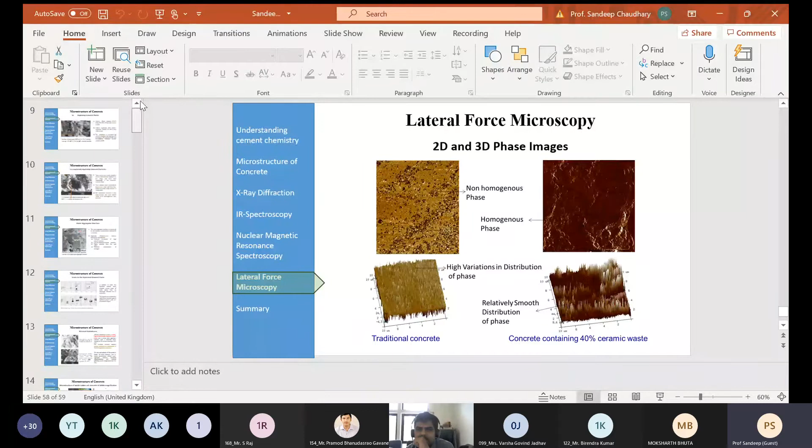So we'll be discussing a little bit about the microstructure of concrete today. If you look into the history of concrete, particularly from the perspective of research carried out on concrete, people used to work on strength aspects some time back - compressive strength, flexural strength, impact resistance. These were the standard tests used to define or ascertain the quality of concrete.

Over the years, people realized that just the strength aspects are not important, but along with that, the durability aspects are also equally important. So people started focusing on durability. We know that the Indian Standard 456 code was revised in 2000, and there's a major change in this code in the sense that it emphasized durability equally as much as strength, compared to the earlier version. People realized the importance of durability, and then they worked on different aspects of it.

Like for strength, people used to do compressive strength tests, flexural strength tests, etc. For durability, people started doing permeability tests, shrinkage tests, corrosion tests, carbonation tests, freeze and thaw tests, and so on and so forth.

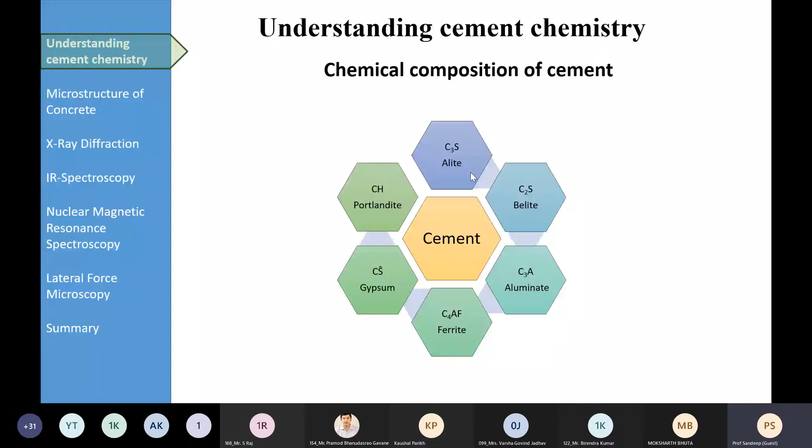There are a large number of reactions taking place in the cement, and these reactions are responsible for the strength we observe, or responsible for the durability properties we observe. So we should be very cautious about the presence of C3S, C2S, alite, belite, ferrite, gypsum, because they participate in these chemical reactions, which ultimately we observe on the surface through tests as compressive strength, flexural strength, or durability properties.

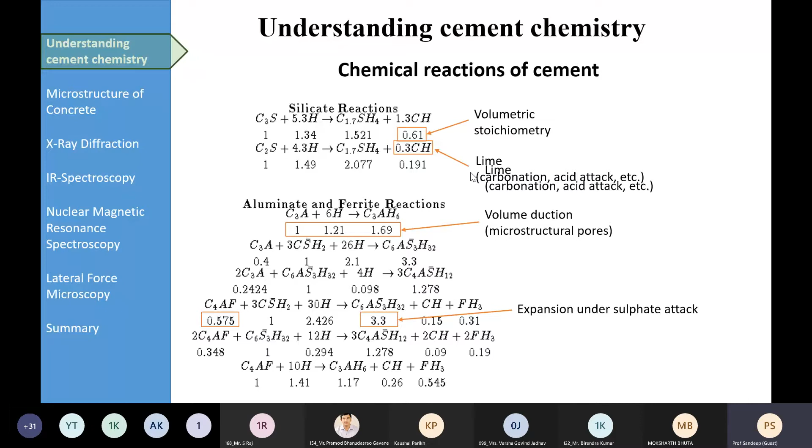So this cement chemistry has a very important role on durability, and it helps in understanding the behavior of the cement first. We need to know the cement chemistry very clearly, because only then can we understand the behavior of the cement, and then durability characteristics like carbonation, acidic attack, and chlorination, etc.

These depend on the free lime present after cement hydration. So again, if we know the cement chemistry, only then will we be able to judge the amount of free lime present after the cement hydration. That again is quite important for understanding durability, etc.

Also, just as compressive strength is one of the most important parameters defining the strength of concrete, similarly one parameter which defines the durability of concrete is permeability. Water penetration depth is also related to permeability, and it depends on the pores formed from volume reduction. This volume reduction is a function of cement chemistry, or hydration reactions, which are themselves a function of cement chemistry.

Similarly, alkali-silica reaction is another durability-related problem, which is quite detrimental sometimes for concrete in the long run. So alkali-silica reaction, sulfate attack, effect of seawater, and other environmental threats can all be better understood through cement chemistry.

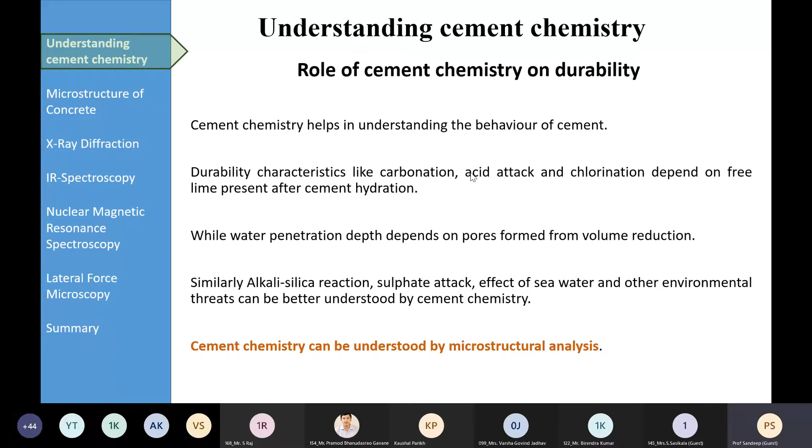Now, to understand this cement chemistry in turn, we need to go to microstructure analysis. Let's see what this microstructure analysis is all about. There are different forms of microstructure analysis. Analysis at the microstructure level can basically be done in two phases: one is conventional microstructure analysis, where we do imaging, etc.

Another is chemical analysis. In conventional microstructure analysis, we identify the mineral arrangements under a microscope. That is, we observe the concrete under the microscope and try to find out which types of minerals are present there. It's like taking a photograph at high magnification, then looking at the image and identifying which type of mineral is present.

This microstructure analysis can be studied using scanning electron microscope, optical microscope, TEM, etc. On the other side, in chemical analysis, we identify the types of minerals formed in the concrete, and this can be done using EDS, XRD, spectroscopy, etc. Both are very important; we need microstructure analysis as well as chemical analysis.

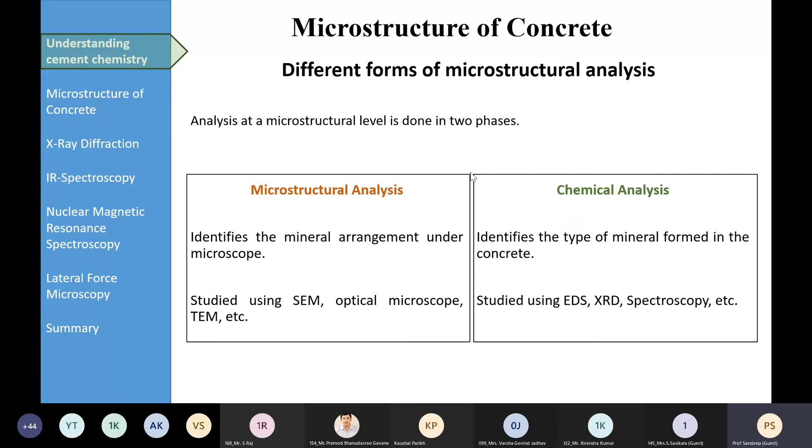Now let's see this microstructure analysis through microscopes. This slide shows concrete under different magnifications where we can see the mineral arrangements. This is how the concrete looks to the naked eye, but if we zoom in at 200x, using a magnifying glass with 200 times capacity, the concrete which looked like this will now look something like this.

If we further zoom into a selected portion, it will look like this at 2000x. If we zoom further to 5000x level, we'll see the concrete like this. So the concrete is the same, but as we keep zooming at different magnification levels, the type of mineral arrangement we see is quite distinctly different.

The idea is that if we just go through naked eye visualization, we'll never be able to see all these different phases which are present in the concrete. And of course, each of these phases has a certain role in the strength development as well as in the durability related issues of the concrete.

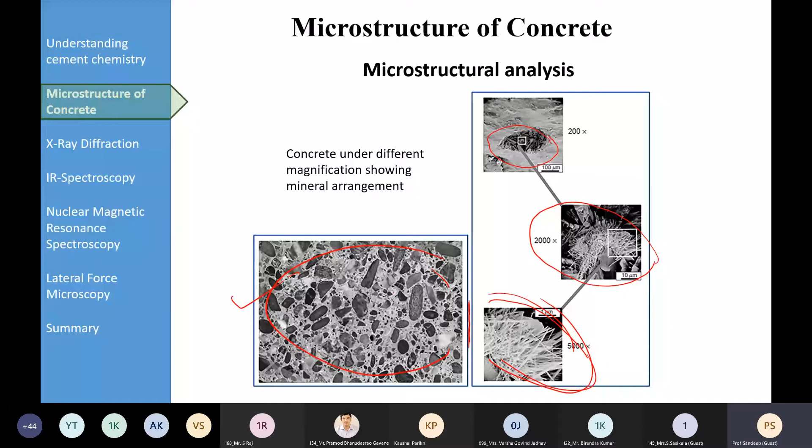So if you have two images of two types of concretes at a certain magnification level, we can say that if one image is having more contribution or more participation of CSH, then we'll say that concrete is better.

This is a typical microstructure image here. You can see these are the aggregates, quartz aggregate, which are present there. This is the cement paste, which is visible here. The magnification level denotes just 200 micrometers. And this is cement paste, this is cement paste, and this is the transition zone between aggregate and the cement paste.

Now, this transition zone is very important. Normally we do think that the strength of the concrete is governed by the aggregates or it is governed by the cement. So conventionally people think that a concrete is going to fail when either the...

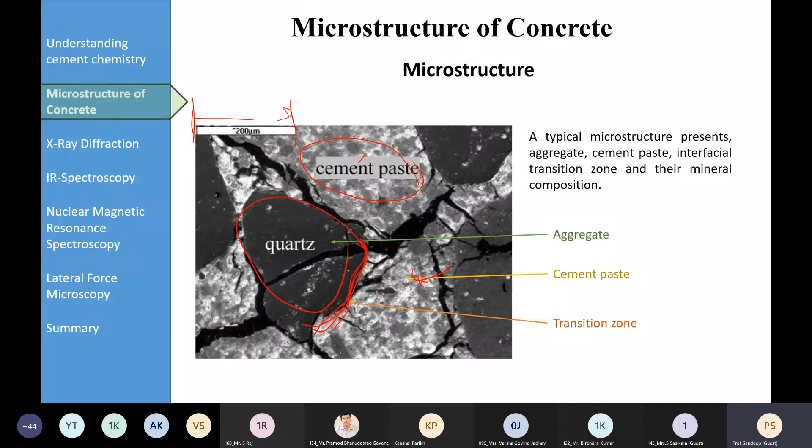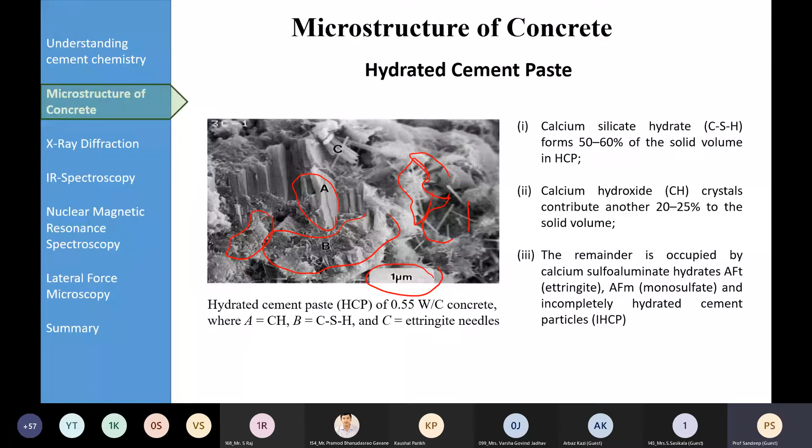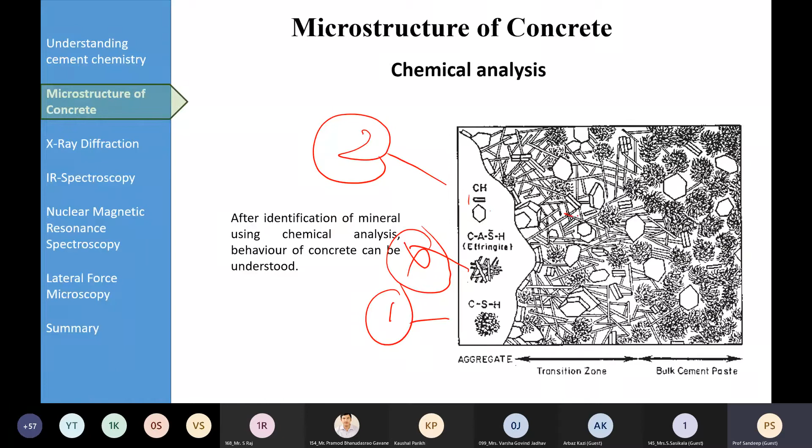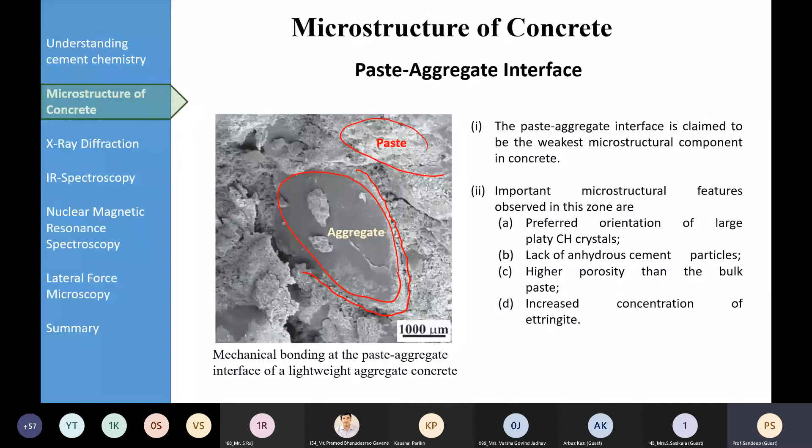Now let's try to understand when we are doing this microstructure imaging, we have to observe the interfacial transition zone also. We have to look for anhydrous, incompletely hydrated cement particles also. We have to look for calcium hydroxide, CSH, and ettringite needles, etc. And we have to see the transition zone very clearly.

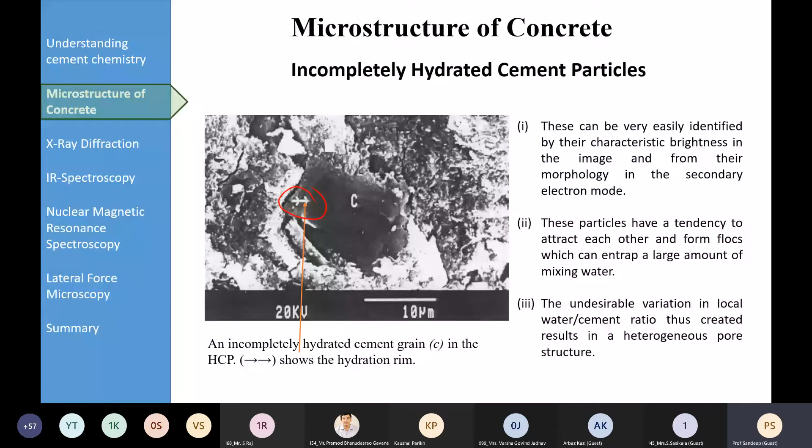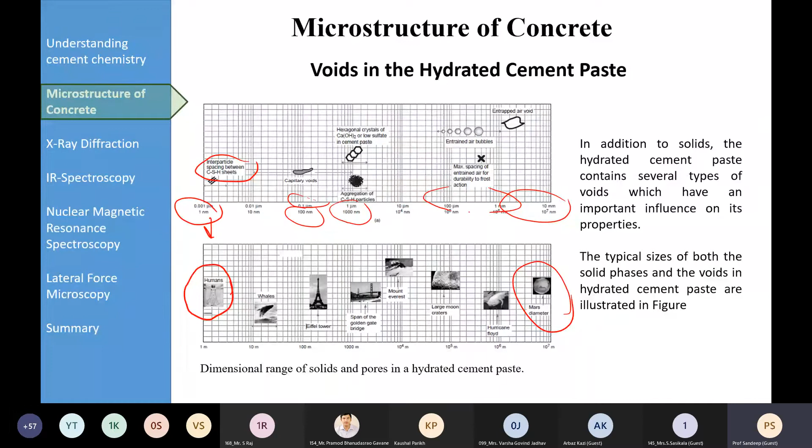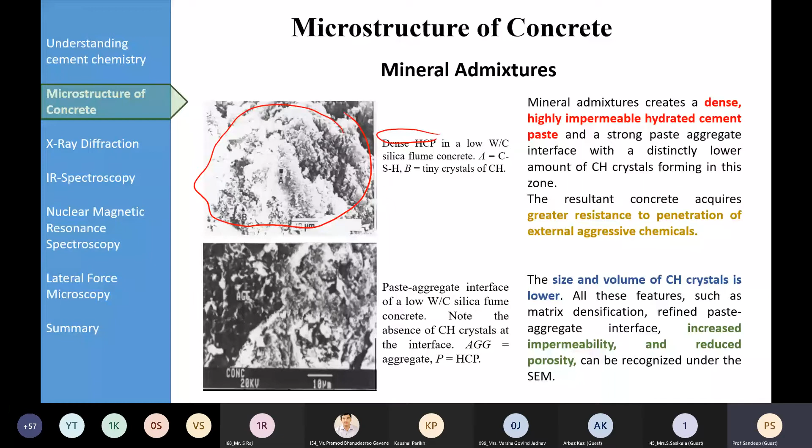Due to this, the resultant concrete will acquire greater resistance to penetration of external aggressive chemicals, and the size and volume of calcium hydroxide crystals will become lower when mineral admixtures are added. Features such as matrix densification, refined paste-aggregate interface, increased impermeability, and reduced porosity can now be recognized under the scanning electron microscope. This is the beauty of it - observing these features gives an indication that we have a solid concrete which will behave better than normal concrete after adding mineral admixtures.

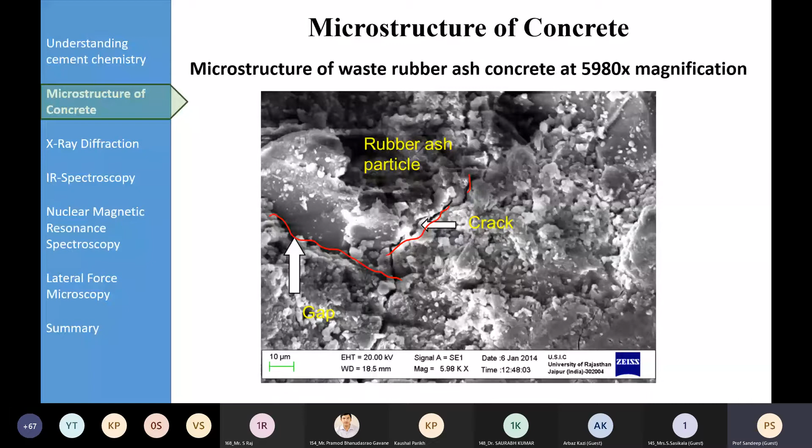The idea is that this gap can be very well visualized, and it gives an indication that the interfacial transition zone is not perfect, so we need to be cautious because the weakest zone of the concrete is not good enough - the strength is likely to decrease. From another angle, this gap is very clearly visible along with the rubber ash particle, showing the gap in the cement matrix, or the crack in the cement matrix.

So you're seeing the interfacial transition zone, you're seeing the rubber ash particle, and you're seeing the cracks in this CSH portion of the concrete. Based on that, some inferences can be carried out about the strength and durability of the concrete. We're not going into that detail right now, but the idea is that yes, they will have an implication.

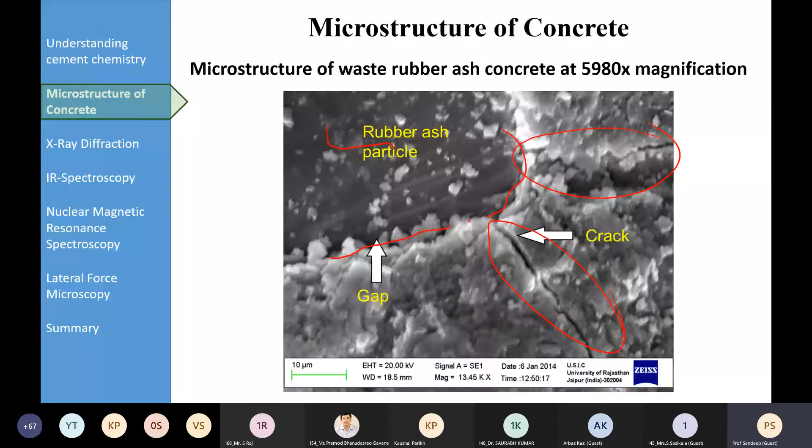These features of the cracking and the gaps will affect the strength and behavior of concrete. At a bigger magnification level, when we use waste rubber fiber from tire, you can see it's clearly, distinctly visible. This is the rubber fiber, and this is the cement paste gap between the rubber fiber. There's a crack within the rubber fiber also.

This crack in the rubber fiber will have its own effect on the ductility properties of the concrete and on the flexural strength, etc. This cement paste gap, if you compare it at the same magnification levels, is slightly less than that of rubber ash concrete. That means the properties will be slightly better than the rubber ash concrete. So if you have to use waste rubber tire, we should use it in the form of rubber fiber rather than in the form of rubber ash.

You can see again here, it's quite visible, rubber fiber and this gap between the cement paste and rubber fiber. Again, it's clearly visible. This is the rubber fiber, this is the gap, so this is a very clear gap. That means the ITZ is still not that strong. And on this side, there's a cement paste. So all the features are quite distinct here.

Based on these distinct features, we can infer or predict what's going to be the effect of the cracking in the rubber fiber, what's going to be the effect of this gap between the rubber fiber and the cement paste, what's going to be the effect of this increased weakness in the interfacial transition zone, and how it's going to affect the overall behavior, strength, and durability of the concrete. So all these aspects can be easily understood if we do a proper microstructure analysis.

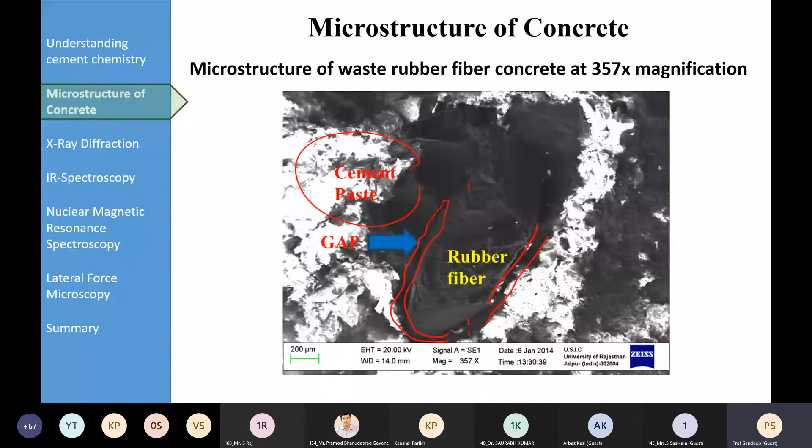Here we try to mix two waste materials, rubber fiber as well as rubber ash, in the concrete. You can see this rubber ash particle is very well visible, and the rubber fiber particle is also visible, and this gap is there at this end also. So the rubber ash particle is also leading to a weak interfacial transition zone, and the rubber fiber particle is also leading to a weak interfacial transition zone. Of course, we can zoom out further and see which one is causing more weakness in the interfacial transition zone, and which one reduces strength more.

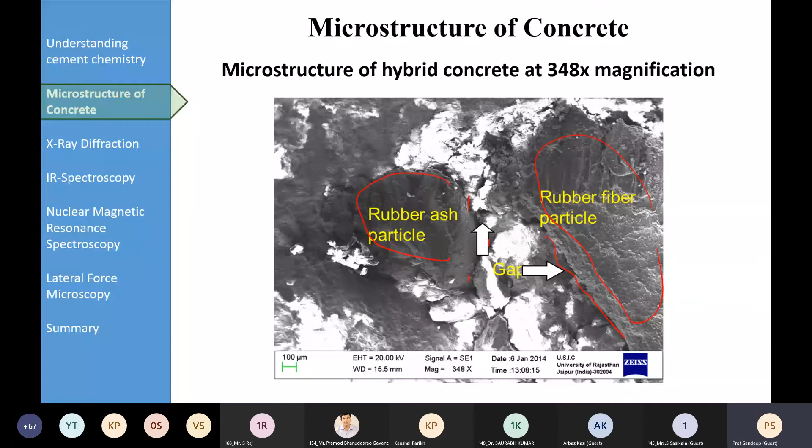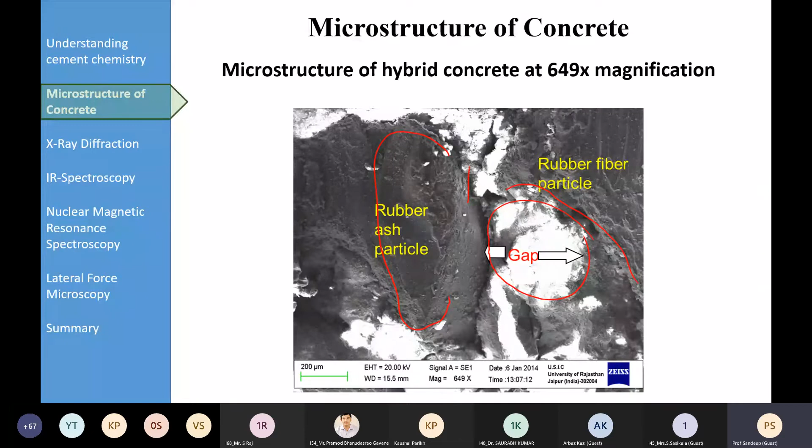But the idea is you can clearly, distinctly visualize how waste particles, even very small in size, affect the overall behavior of concrete due to their replacement in the concrete. So here you can easily see this is the rubber ash particle, and this is the rubber fiber particle, and there's a gap between the rubber fiber particle and the rubber ash particle. This gap is clearly visible, and of course its effect can be studied in detail.

Again from another angle, you can see this is the rubber fiber, and this is the interfacial transition zone. Within this interfacial transition zone, the rubber ash particles are lodged. That's an interesting thing. There's a rubber fiber, there's a hydrated cement paste, a CSH gel, and between them there's an interfacial transition zone.

Just a minute. Hello. Uh-huh. Yeah, sorry for the interruption. Yeah.

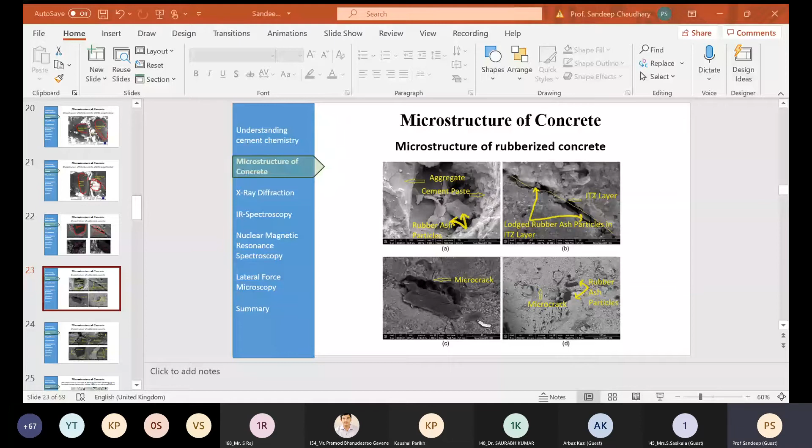So basically, you can see very interestingly that one waste material gets lodged into the interfacial transition zone between the other waste material and the cement matrix. You can also see the internal cracking of the fibers here. Of course, this internal cracking has its own effect, in the sense that if you give some impact loading to the concrete, this internal cracking of the rubber fiber means the rubber fiber will crack by itself first.

It will absorb energy by cracking itself rather than cracking the cement matrix, increasing the impact resistance capacity of the concrete. This is what you observe if you use waste rubber fiber in concrete - a higher impact resistance, which is otherwise difficult to justify and predict by conventional tests. But based on this, you can correlate the effect of the microstructure.

Here you can see an aggregate and cement paste, and these rubber ash particles - very clearly visible lodged rubber ash particles. You can see even the micro cracks here, and the micro cracks within the rubber ash particles. They will also have their own role to play, supporting the higher impact resistance of the concrete.

So the idea is you have to identify and see the magnification levels, and at those magnification levels... am I audible? There's some disturbance, I think.

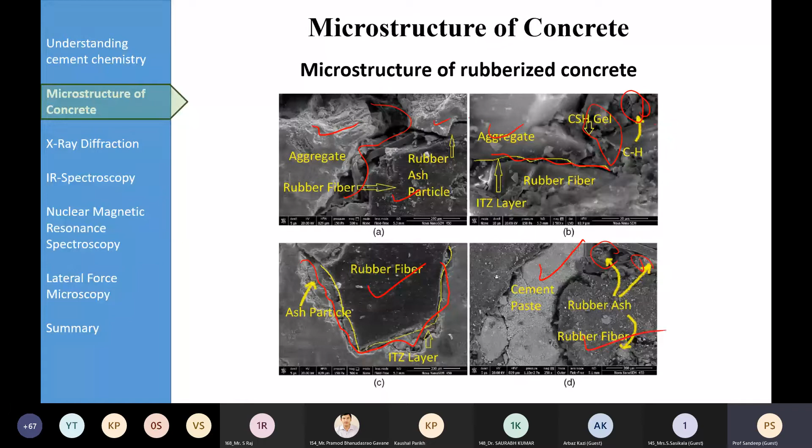Even you can see the effect of temperature. You don't need to go even for scanning electron microscope, because that's costly equipment which costs more than 1 crore rupees. You can use normal optical microscopes also, which cost less. So here, through the optical microscope, images were taken and we tried to see the effect of temperature on this rubberized concrete.

Here you can see it's just a 90x magnification level, and even at 90x, through a normal optical microscope which is otherwise available in most laboratories, you can easily see this gap between cement paste and rubber fiber - very clearly visible. So you need not always go for that high level.

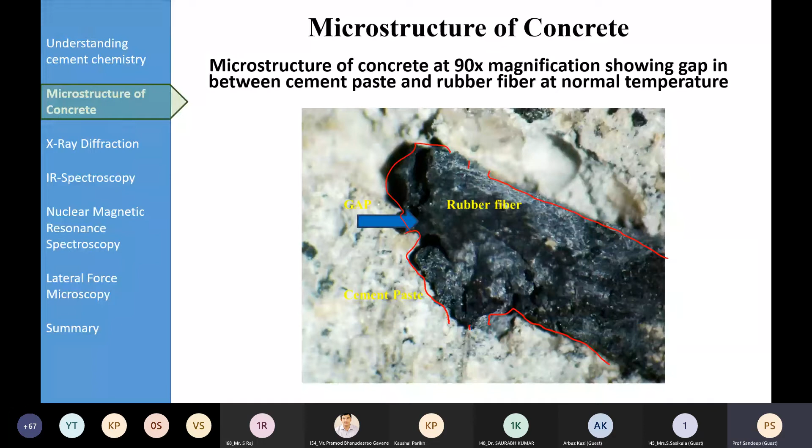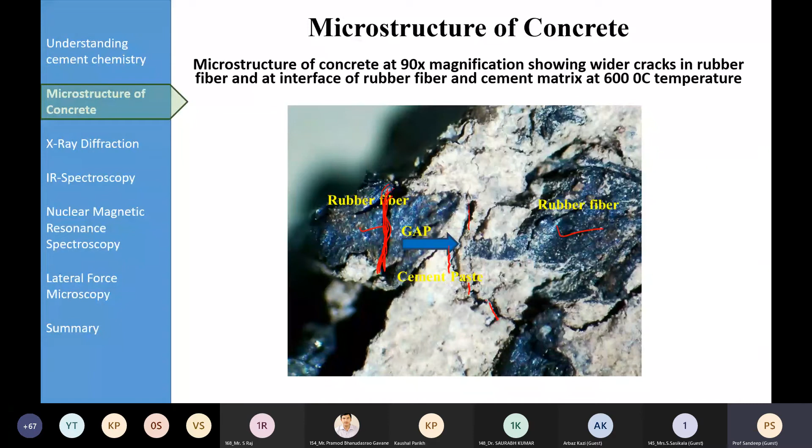Again, this is the rubber fiber, and there is cracking within the rubber fiber also - the gap is increasing. There is internal cracking within the rubber fiber, and the gap between the rubber fiber and the cement matrix is also increasing at 600 degrees centigrade.

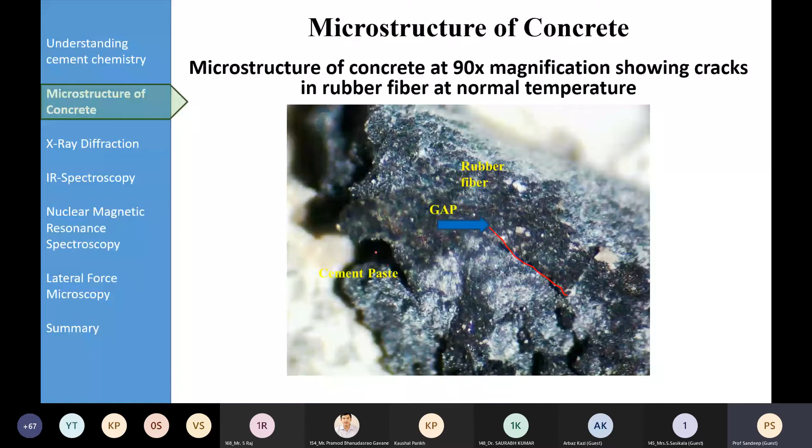You can see at normal temperature this was the gap, which has now increased. At 600 degrees, we are talking about this part - at normal temperature it looked like this, but at 600 degrees centigrade, at the same magnification level, the size has increased. So within the rubber fiber also, the crack size increases when concrete is subjected to higher temperature.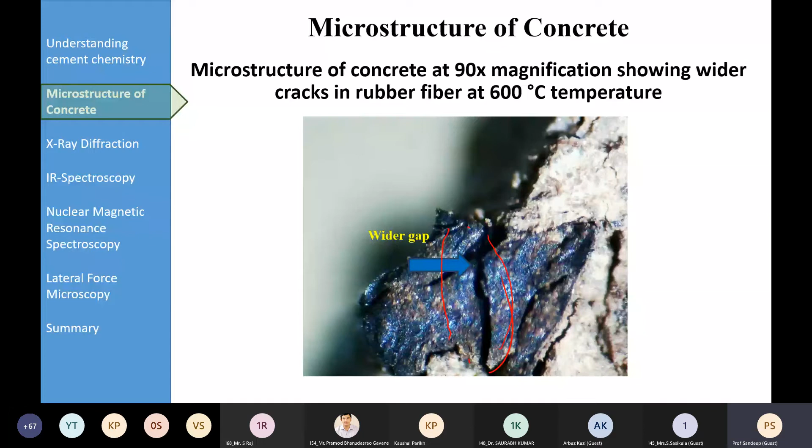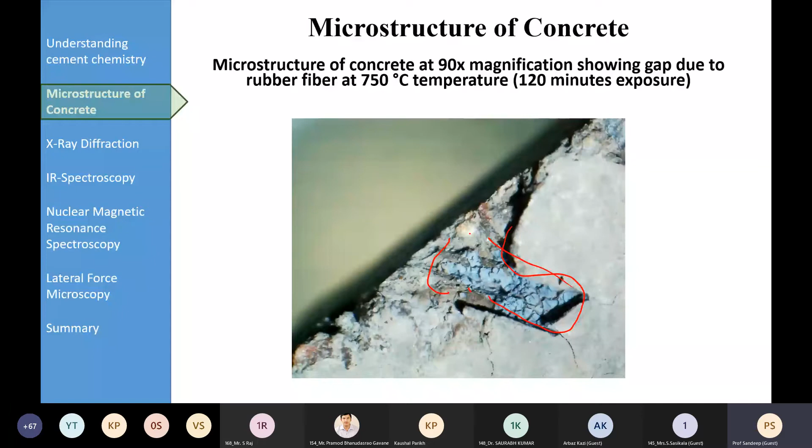At 750 degrees centigrade, this is clearly visible - the rubber fiber is sort of coming out of the cement matrix, breaking bond almost clearly from the cement matrix. This is another observation which can be seen, and even the micro cracks and surface cracks can be observed through these images.

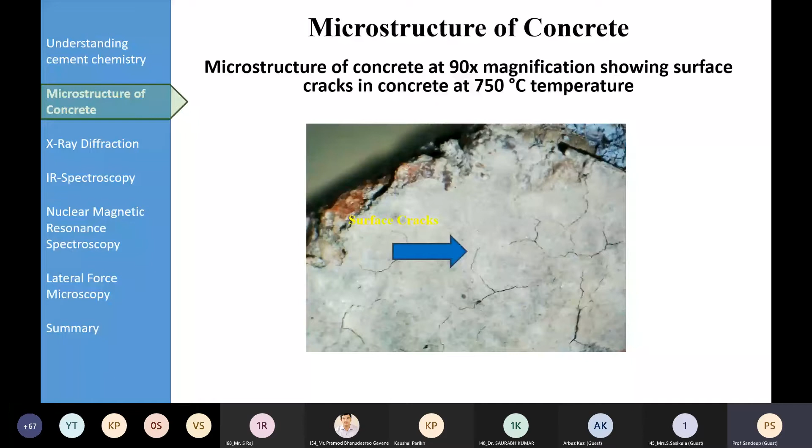Now, it's not only about use of waste material, but we can also look at the level of material itself. People often talk about fly ash, and we know fly ash is a pozzolanic material, which in the presence of cement and water reacts to form calcium silicate hydrates. And earlier, ordinary Portland cement was used.

Nowadays, most of the time you get Portland Pozzolana cement, PPC cement, which comprises a good portion of fly ash. So why does this fly ash improve the properties of concrete?

That is very well understood by the microstructure. You can see there are two microstructure images at the same magnification level, that is 2500x.

So same magnification level, 2500x. If you compare the cement particles and the fly ash particles, the fly ash particles are quite smooth and spherical. That smooth, spherical shape tells us that the hydration reactions are going to be more, because the particles are spherical, so there is more surface area available. More surface area means more reactions, and more reactions mean greater strength. So this is what can be observed here.

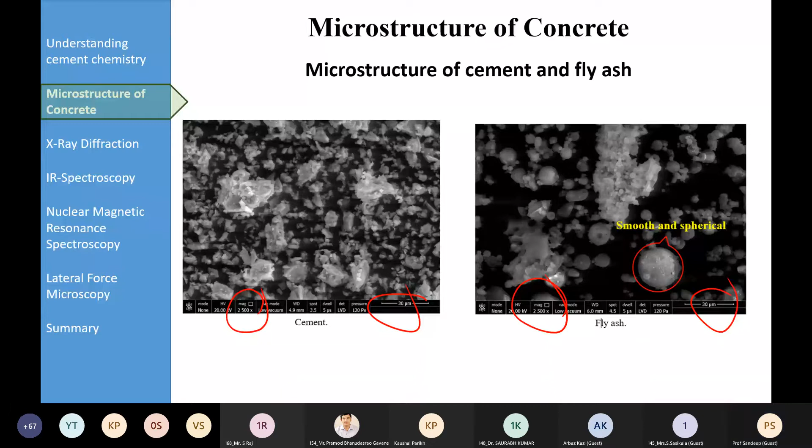Even when we try to replace the fine aggregate by granite waste, we saw its microstructure image, and it is more or less similar to the one we are seeing here. So it's always advisable to first compare microstructure images. If you're replacing the fine aggregate with a certain material, we can compare them. Even if you are trying two admixtures, we can compare their microstructure images and at least predict which material is going to behave properly and give good strength.

So here you can see the microstructure of granite waste concrete. When it was put in the concrete, the ITZ is clearly visible here. These voids are clearly visible. This is the clearly visible ITZ, and these are cracks, and these voids are visible here—ITZ again, these voids, and this ITZ. So these features can be easily identified by going through scanning electron microscopy.

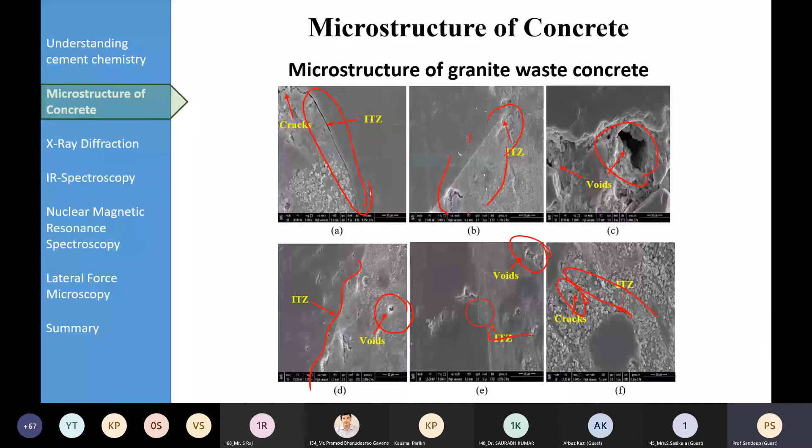Another advanced microscopy technique is TEM. You can see the silica fume particles if they're further zoomed in under TEM—this image denotes just 0.5 micrometer. Even at that zoom level, these particles are looking smooth and spherical. That gives us confidence that silica fume particles are quite smooth and spherical, and that is one of the reasons why silica fume is used for high performance concrete.

Those who have been working in concrete technology know that Indian Standard 10262, in its recent version, has defined a separate mix design procedure for high strength concrete, and while defining it, they have suggested the use of silica fume. The reason is this only: it has quite smooth, spherical particles and small size, so it gives a very large surface area for the hydration reaction, which means a large amount of hydrated cement paste, or CSH gel, which in turn means good strength.

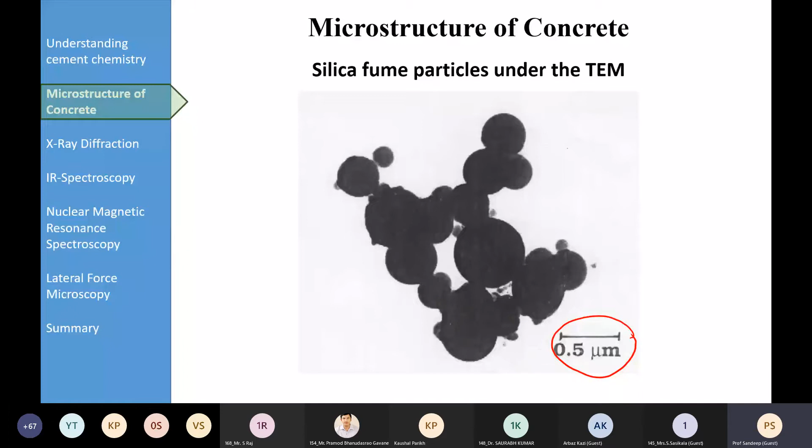Another technique is called X-ray diffraction. In scanning electron microscopy we use sort of pellet samples, but in XRD technique we use powdered samples—we just crush the concrete and take a representative powder sample. XRD is based on the principle that each crystal has a unique pattern and reflects different intensity of light at different angles. This XRD analysis identifies the minerals present in the sample using the observed intensity patterns.

So typically this is how XRD is shown: this is the X-ray beam striking the sample, and these are the diffracted beams, and this is the detector which receives the signals and detects at what angle this is getting reflected. Based on those angles, you can identify the minerals present, and of course standard databases are there which you can use.

Corresponding to each angle, there might be 100 types of minerals which could be there, but we have to identify which mineral is likely to be present in our concrete matrix. So we just identify that.

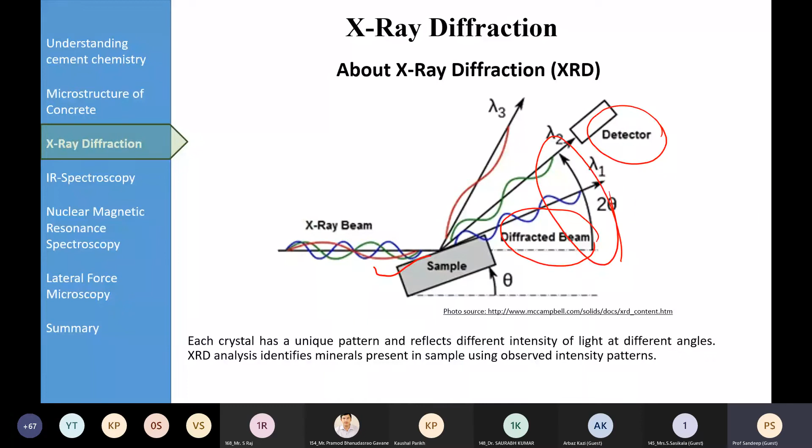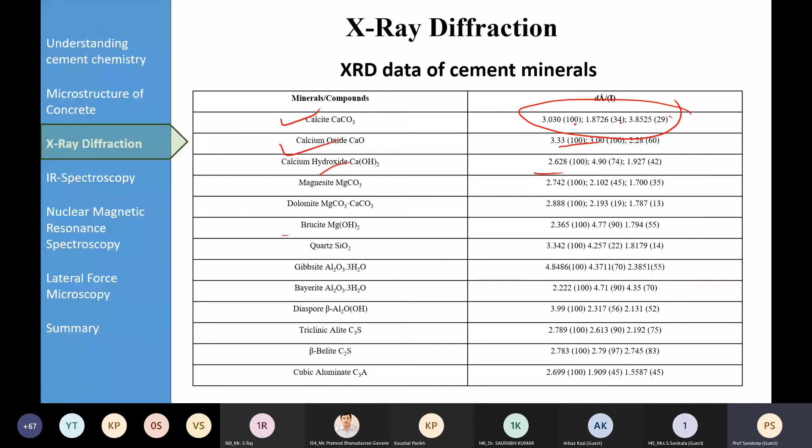This is a typical XRD pattern of alite, where even in alite, it is not just one type. People think that if C3S is there, only the total presence of C3S is important. But what is important is how much, and in which form it is there - whether it is present in rhombohedral form with a single sharp peak, or monoclinic form with two sharp peaks, or triclinic form with multiple sharp peaks, because each form will also have a different effect on the overall cement chemistry and concrete matrix.

Now these monoclinic and triclinic forms are basically predominant in clinkers, and the rhombohedral form is rare. So the idea here is that the peak patterns for different mineral phases are quite unique.

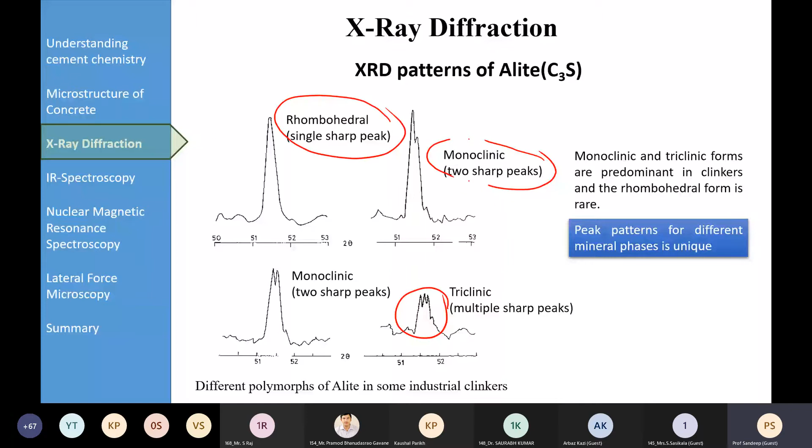For other types of cement composites also, the belite alpha phase will look like this, belite beta phase will look like this, C3A XRD pattern will be like this, C4AF will be like this. Here you can see there are two peaks - one peak observed at this angle, another peak observed at this angle. So it is not necessary that only one peak will be observed corresponding to one composite or one mineral.

There can be multiple peaks, like for beta C2S, so many peaks. C3A also has multiple peaks. So we can identify that it's not that there will be only one peak - there can be multiple peaks also for each mineral.

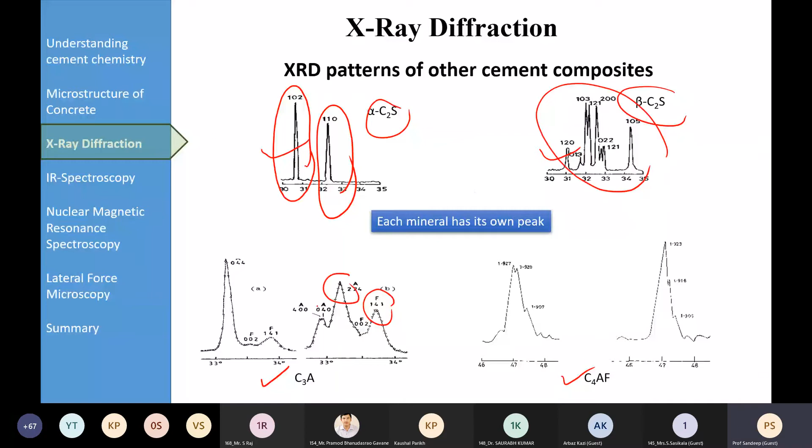Here typically this is an analysis of an XRD pattern for fly ash, which was done in our laboratory only. Here you can see easily that this is the most dominant phase, quartz, and this quartz is present at other angles also. So quartz is there, and then mullite is there - that's mullite. Along with quartz, there is mullite. Of course, quartz is also predominantly available at this angle, but then it is present at different angles also.

Similarly, mullite is also predominantly available at this angle, you can say, but then it is present at different angles also. So minerals present can be understood by recognizing the peak patterns of known minerals, and based on the initial peak, the quartz is identified.

This is quite a high peak, and this is basically a relative intensity count. Next time it may be 3500, it doesn't matter, but it is a relative count of 1:2. The absolute values are not important. What is important is relative intensity. So that should be understood.

So minerals present can be understood by recognizing the peak patterns of known minerals, and based on the initial peak, quartz is identified here. And after removing the pattern of quartz, once you remove that, then you can identify the mullite. So this is the manner in which you need to do the XRD analysis.

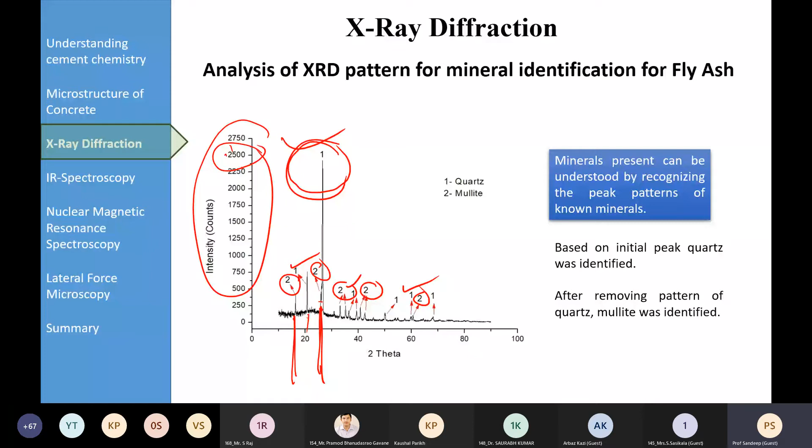Like here, this is mineral identification in other samples like quartz, albite, microcline. So you are able to see the quartz, you are able to see albite, and you are able to see microcline also. Here, this is about the fine aggregate, but if you talk about granite waste, then along with quartz, albite, microcline, there's orthoclase also and anorthoclase also. So different types of minerals are present in different samples.

And when we compare, like here, if we compare this fine aggregate to granite waste, we are replacing the fine aggregate by granite waste. So what benefit we are getting from these XRD images is that we very well know in the beginning only that once we replace the fine aggregate by granite waste, then basically two more types of minerals will be there, orthoclase and anorthoclase, which are not there in the conventional natural fine aggregate. That means whatever effect we will be observing, that effect will basically be the effect of orthoclase and anorthoclase.

That is one thing. Another is we have to see also the relative intensity. So the relative intensity of quartz is less here as compared to this. So though quartz, albite and microcline are present in both, the relative intensities are also changing. Based on that relative intensity also we can predict the behavior. This was at the level of aggregate, or the level of ingredients, raw material. Here this is the level of concrete. So here, on the left side you are seeing the XRD pattern of a traditional concrete.

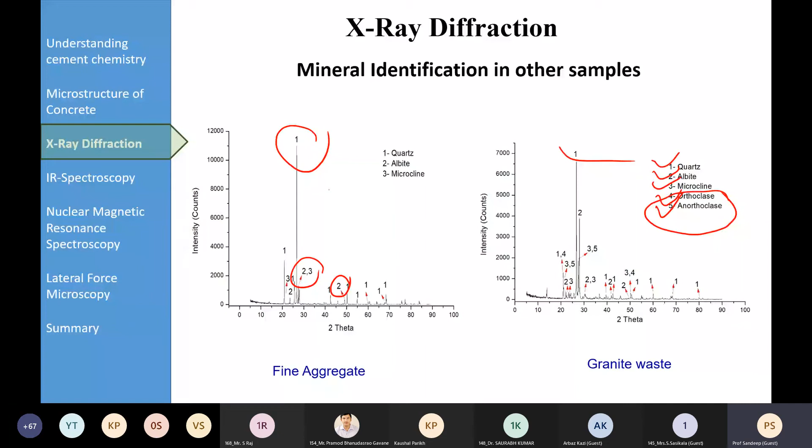So here you can see we are observing basically silica, CSH, portlandite, ettringite, dolomite, calcite, alumina, sodium oxide, potassium oxide, magnesium oxide. But for this 40% ceramic waste, when we replace 40% of this fine aggregate by ceramic waste in the concrete, then the minerals which you observe are the same again: silica, CSH, portlandite, ettringite, dolomite, calcite, alumina, sodium oxide, potassium oxide, magnesium oxide.

That means that no additional chemical is formed, and more or less the behavior will be the same. So it might not be beneficial, but it's not going to be detrimental either. Of course, certain relative intensities are changing, so we need to take that effect into account.

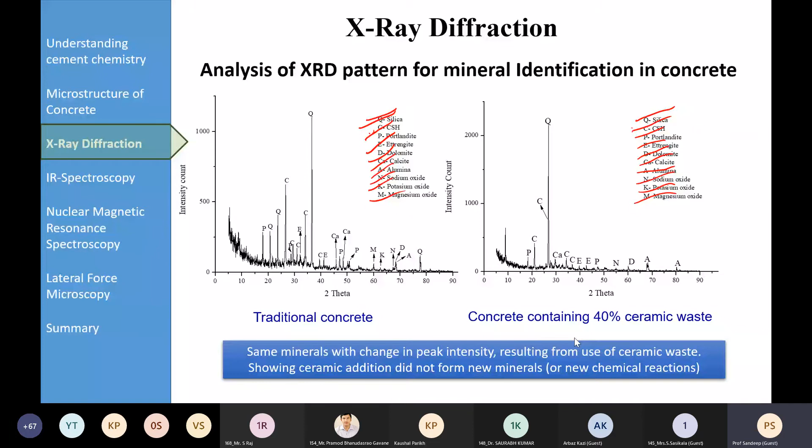So we can see that the same minerals are present in both types of concrete, with a change in peak intensity when we use the ceramic waste. This shows that ceramic addition is not forming new minerals and no new chemical reactions are occurring - only the relative intensities are changing. Similarly when we replace by 20% and 60%, every time we get more or less the same type of minerals or chemical composition. Only the relative composition changes.

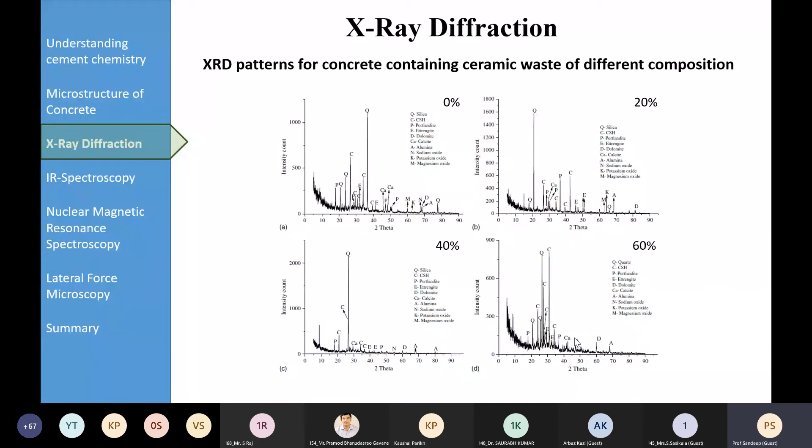We can also do the durability assessment - alkali silica reaction is one of the common reactions which decreases the durability of concrete. This probability of alkali silica reaction is basically a reflection of the intrinsic crystallinity of the silica form. We know that silica is present in two forms, amorphous form and crystalline form.

This crystalline form is detrimental in reference to the alkali silica reaction - alkali silica reaction is basically due to the crystalline form of silica which is present. So as such, the total amount of silica is not detrimental to the concrete from the perspective of alkali silica reaction, but the crystalline form of silica is detrimental.

Now the crystallinity index of silica by XRD technique is based on the measurement of relative heights of peaks occurring between the 2 theta angle of 67 to 68 degrees. The relationship of mortar bar expansion with crystallinity index of various forms of silica is also compared with the help of an autoclave expansion chart. So we can find out the crystallinity index, and this will give us an indication of how much alkali silica reaction is going to take place.

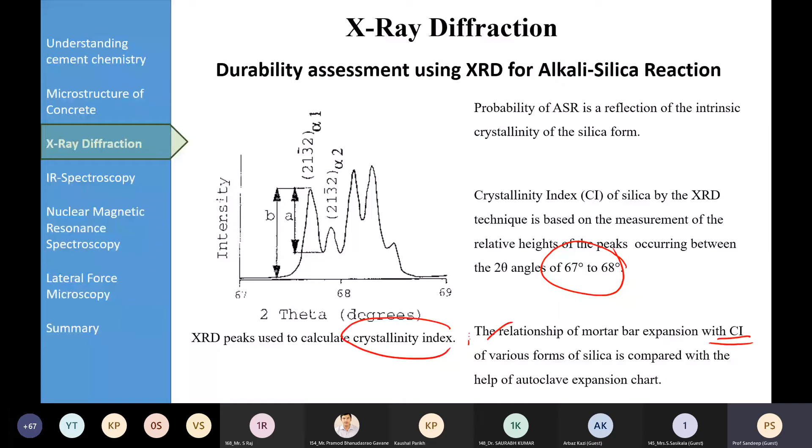Similarly, we can identify the sulfate minerals. Generally we consider all sulfate minerals together, but actually we need to understand that they are present in different forms, and each form has its unique role in concrete behavior. So we need to understand whether it is present in the form of ettringite, as observed here, or in form of thaumasite, or monocalcium sulfate, calcium monosulfate hydrate, or in form of gypsum, or in form of boehmite. Every type of sulfate mineral will have a completely different role to play in cement chemistry or the concrete matrix.

This is otherwise not possible to do by normal analysis, but through XRD we can identify these different types of minerals: ettringite, thaumasite, calcium monosulfate hydrate, gypsum, boehmite. Ettringite is basically C3A·3CS·31H, thaumasite is CS·CaCO3·CS·15H, gypsum is CS2H. So all have different chemical composition - only thing is they are all sulfate minerals. So by XRD we can easily identify which type of composition is there.

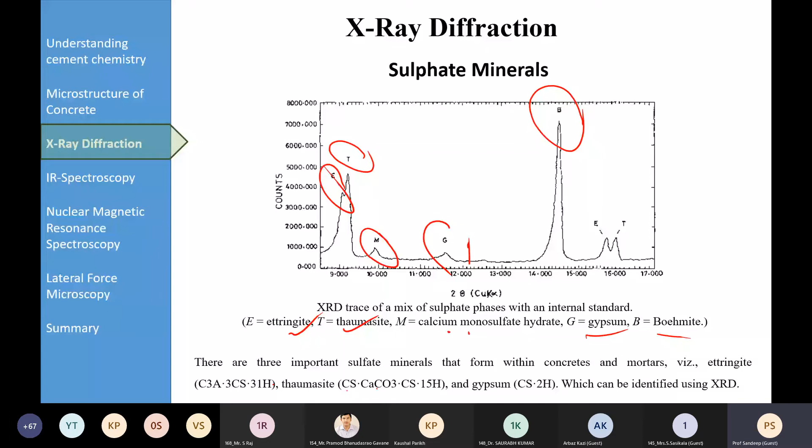Then we can go for IR spectroscopy also. This is a very recent tool, comparatively new in cement and concrete, but it is gaining much importance with the advent of user-friendly equipment and continuing research on identification and characterization of reaction products and new materials. This technique identifies the bonds based on energy absorption - the energy is absorbed at a certain level, and based on that it identifies the bonds, though the bonds are not directly the sort of concrete bonds.

We have to identify which type of bond is there. Here we can see S tells us it is a strong bond, M means medium bond, W means weak bond, V means variable bond, N means narrow bond. At what wave number we observe the energy absorbed, corresponding to that wave number, we can see what type of bond it is, and that bond can be related to the minerals present in the concrete.

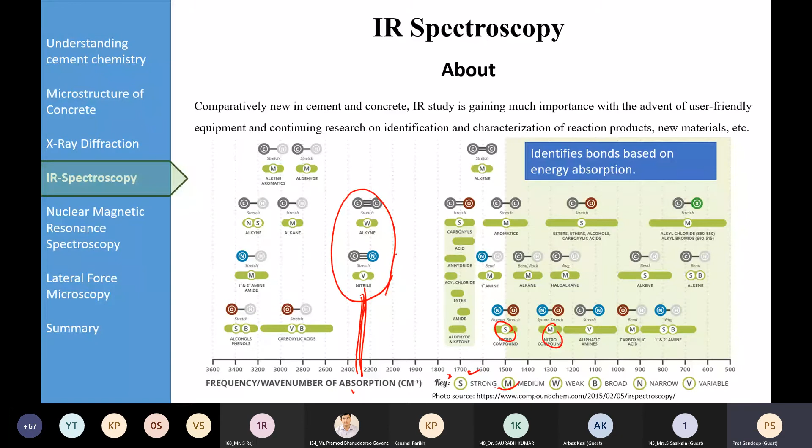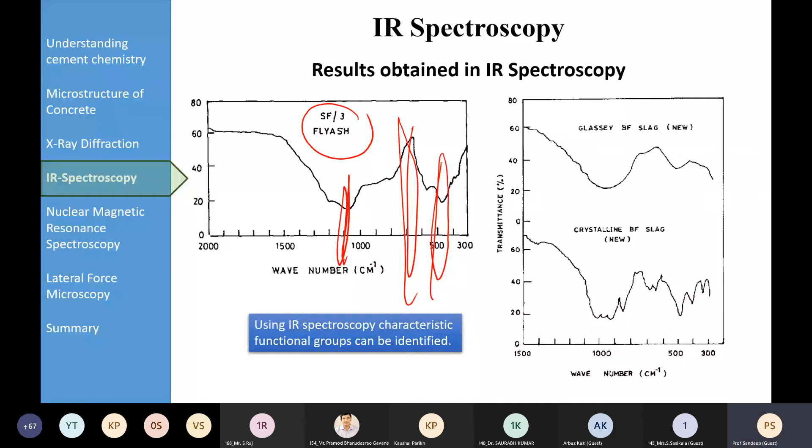So here are typical results obtained in IR spectroscopy for fly ash - its IR spectroscopy will look like this, showing some peaks here, some here, and some here. Similarly for slag, you can also see certain peaks. Based on that characteristic functional group, you can identify it. Here also, for gypsum, you are identifying it at different levels.

So you can identify such type of minerals at different levels. Like here you are identifying the band at 1140, and also 668, also somewhere here, and 602 also.

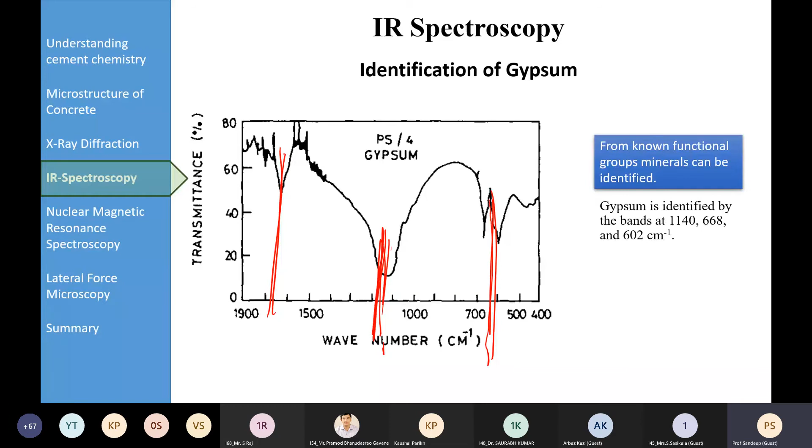You can also estimate the dolomite content, which is very important because when people are trying to look for the clinker for the cement industry, it is important to know how much dolomite is present. The infrared spectra of calcite and dolomite are typically characterized by bands at 711 and 727 wave number respectively.

These bands are typically unperturbed and sharp with varying intensity depending on the concentration of these minerals. So here you can see, if 20% dolomite is present, it looks like this; 30% dolomite looks like this; 40% dolomite looks like this. So how much dolomite is present, based on that these characteristic peaks are going to change, and you can quantify the minerals basically.

So this is the typical characterization of clinker, which here is containing about 20% dolomite, here about 30% dolomite, here about 40% dolomite. Just by IR spectroscopy you can estimate the dolomite content very easily, which otherwise is a difficult task. Based on that dolomite content, you can decide whether you are going to use that limestone in your cement industry as a clinker or not.

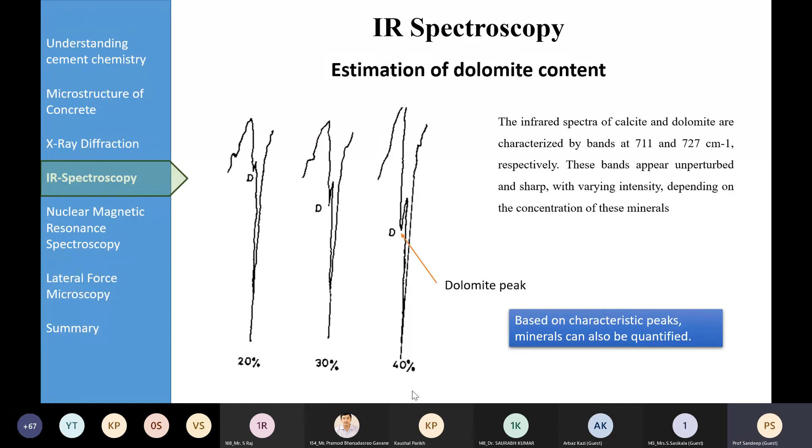You can identify, like each mineral has its own characteristic phase, and corresponding to that characteristic phase there are certain wave numbers associated. Like for C3S also, you can observe it in triclinic phase, monoclinic phase, and oxidizing phase.

If you are seeing it in triclinic phase, you'll observe it at these wave numbers. Its monoclinic phase will be observed at these wave numbers. Oxidizing phase will be observed at these wave numbers.

Similarly, belite is in 3 phases, so belite can be observed in 3 phases, and these are different wave numbers at which it is observed. Similarly C3A also, at different wave numbers it can be observed.

So this is how you can identify the cement composites. Not only the cement composites, you can identify the phase in which they are present in the concrete.

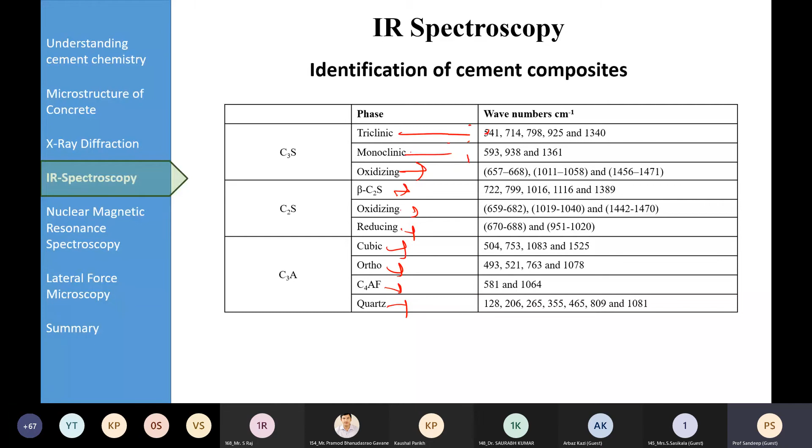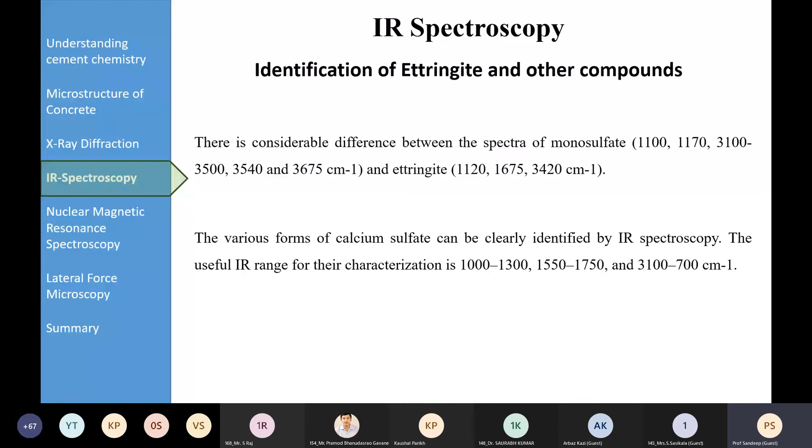Again, through IR spectroscopy, if you compare, as you were discussing about the sulfates, different types of sulfates, there is a considerable difference between the spectra of monosulfate and ettringite, etc. That can be well differentiated by the use of this, and the various forms of calcium sulfate can be clearly identified by IR spectroscopy. The useful IR range for their characterization is 1000 to 1300, 1550 to 1750, and 3100 to 700 wave number. So basically you can identify different types of sulfates using IR spectroscopy.

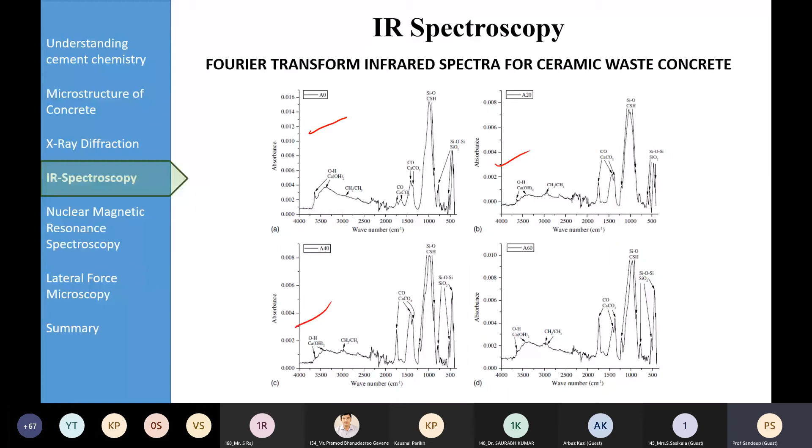So again here, this is FTIR spectra for control concrete, FTIR spectra containing 20% of ceramic waste, FTIR spectra containing 40% of ceramic waste, and FTIR spectra containing about 60% of ceramic waste.

Another important microstructure technique is the NMR technique, and there are certain advantages. Like here you can see how much CSH is formed and in which phase it is formed.

CSH is the dominant strength forming phase in Portland cement paste, and determination of its structure and behavior has been a central topic of cement science for many decades, because we want to see how much CSH has been formed, in which phase it is there, and how much hydration reaction has taken place. So NMR spectroscopy can be used.

Like here, you can see the C/S ratio changing from 0.41 to 0.79, 0.88. So depending on the C/S ratio, that means more and more hydration reaction is taking place. Depending on at which level the C/S ratio we are getting, that will give us an indication of how much hydration reaction has taken place.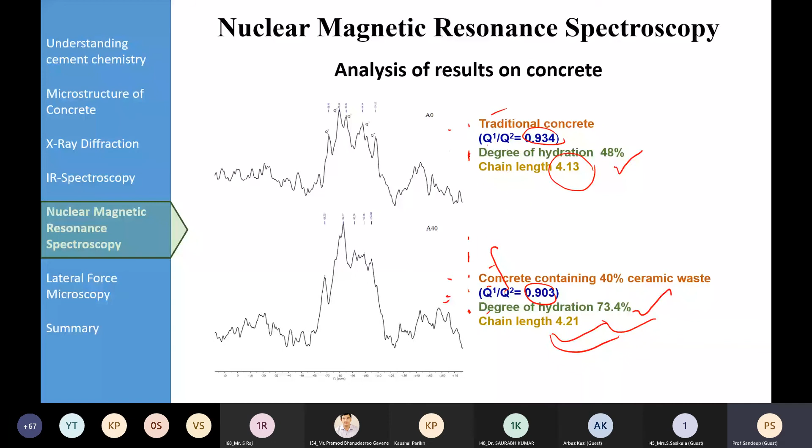Another very latest technique is lateral force microscopy, useful for observing the surface structure of insulating materials by physicists. It's a very delicate technique because the needle is very, very sensitive. In the field of cement and concrete research, they are now being used for observing the crystal structure and surface structure of clinker minerals, hydrates, and adsorbed layers of organic admixture on the surface of cement particles.

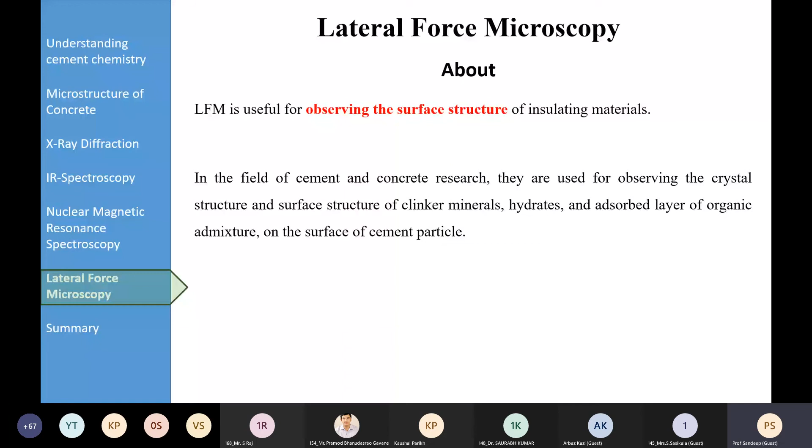If you see the image here, you can see some bright spots - these bright spots are unhydrated cement particles, and you can see some pores also. But if you see this type of concrete, there are no bright particles and no pores. So if you compare these two types of concrete, you can easily say that the left side concrete has more unhydrated cement particles and more pores, but the right hand side concrete is better.

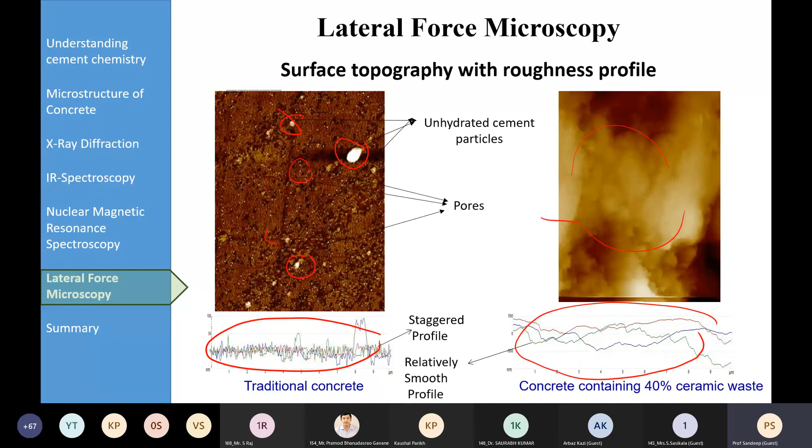You can even see this 2D and 3D phase imaging also. If you see the 2D image of the two concretes, here it is showing non-homogeneous phase, but here you are seeing quite homogeneous phase. If you go into 3D phase imaging, there's high variation in distribution of phases here, and relatively smooth distribution of phases there. So this is what can be done through lateral force microscopy also.

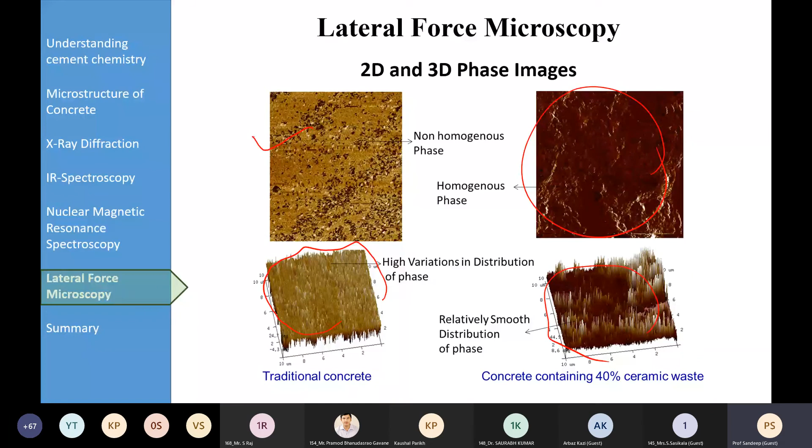So these are different uses of microstructure images, microstructure analysis technique. I think now we can have some discussion. Dr. Parikh?